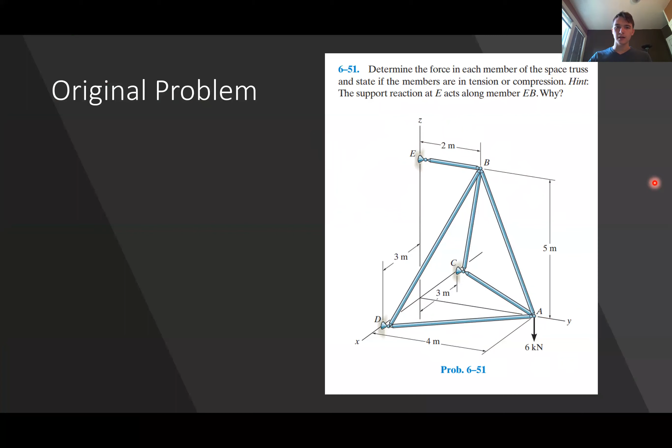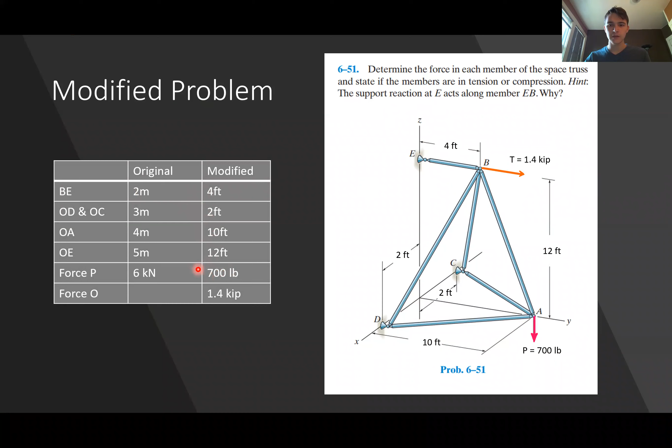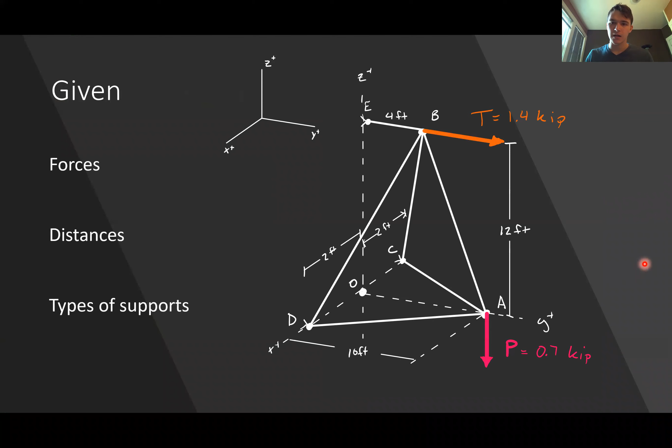This is the original problem, and we've modified it a little bit. So we've actually added a new force, and we've changed the distances and the units. So we were given our space truss, the distances, the forces acting along each point, and we were also given the types of support. It was a little hard to see, but these are actually ball and socket.

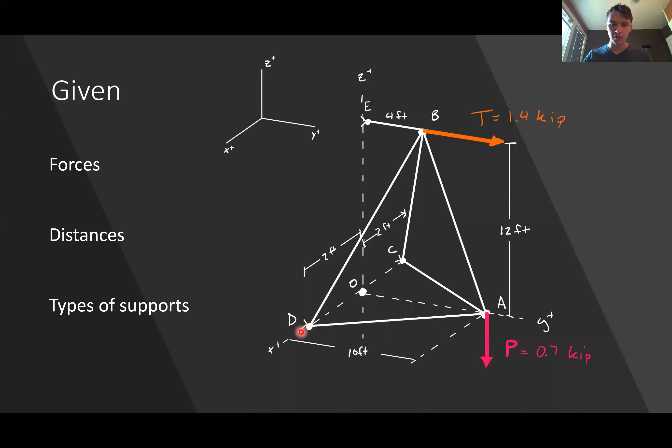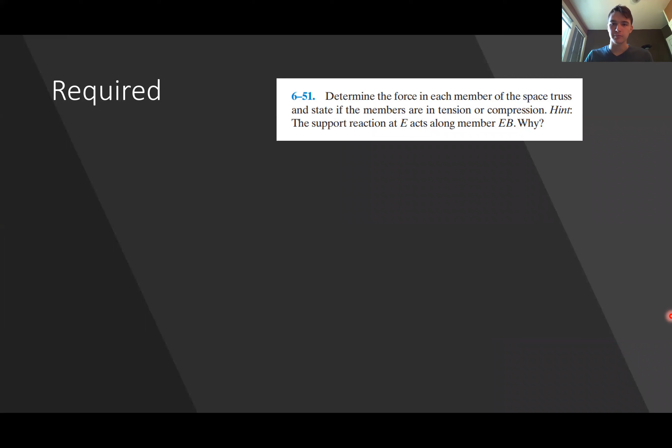So what's required? Well, we need to find the forces in each member, whether they're in tension or compression. And then we'll also need to know the Cartesian vector form. That's what I'll be using, but you can also use the scalar method. I just think the Cartesian is a little bit more straightforward. We also need to know how to use the joint method or section cuts. For this specific problem, I'll be using the method of joints.

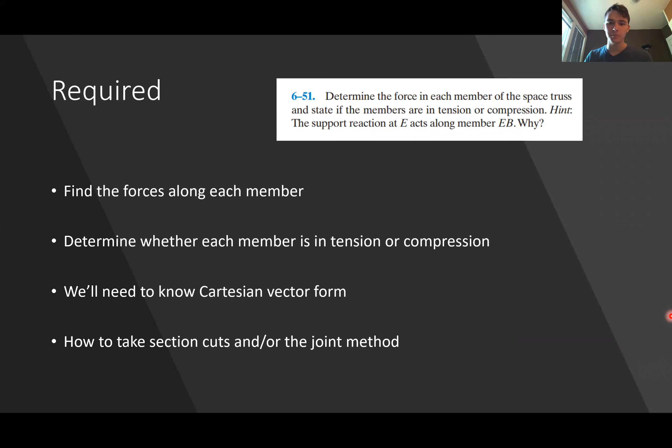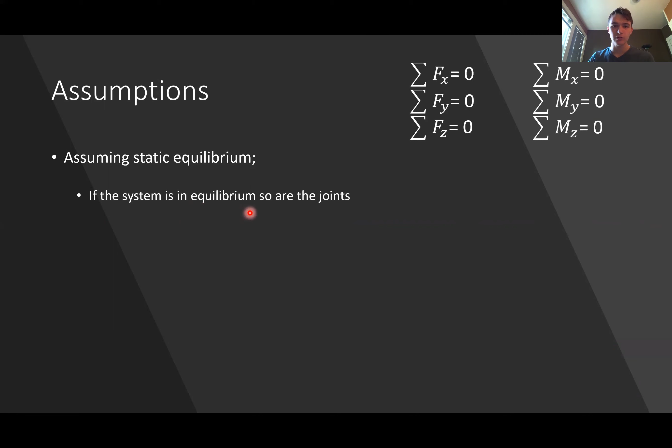So our assumptions, we're assuming it's in static equilibrium, and this gives us our 6 equilibrium equations. And it's a good point to note that if the system is in equilibrium, so are the joints. The types of pins was a ball and socket, which doesn't allow for any translation in the X, Y, or Z. It doesn't allow for a moment, so there are no moments. And then we'll be using the Cartesian vector form, finding the position vector, then the unit vector, and then we'll use those to determine the force in the member, which leads us into strategy.

So we'll actually find each point, and we'll use this to find the position vector, and then the unit vector. We'll use the method of joints to solve the members, and we'll be using this tension technique, which assumes the members are always in tension. And this makes it easier on us. If the value is positive, it confirms it's in tension, and if it's negative, it indicates that it's in compression. And then we'll use the equilibrium equations to solve for the forces.

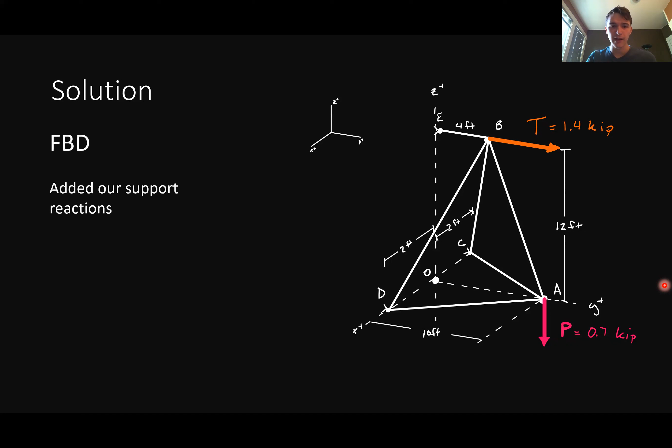So our solution, where do we begin? Well, this isn't a complete free body diagram. We actually need the support reactions. So we have the ball and socket preventing translation in the X, Y, and Z. We have that on D and C. We only have one support reaction on E, and it gave us a little hint in the problem that there's a collinear support member acting along EB. And that's because this member here acts like a free hanging member. So it only allows for one support reaction here.

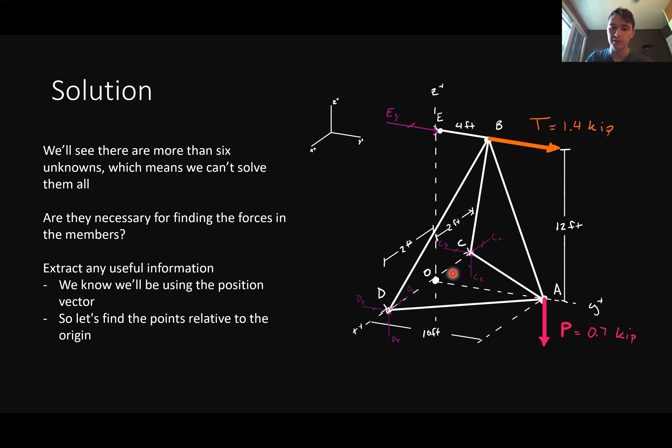But that's still 7, which is greater than the number of equations we have to use. So there's no real way we can solve for the support members with the things that we know now without using any tricks. But is it even necessary to find the support reactions? In this case, it's not. We can start at the joint and still find the forces in each member. We will extract some useful information, like the points at A, B, C, D, and E, in terms of its position from the origin. So we'll do just that.

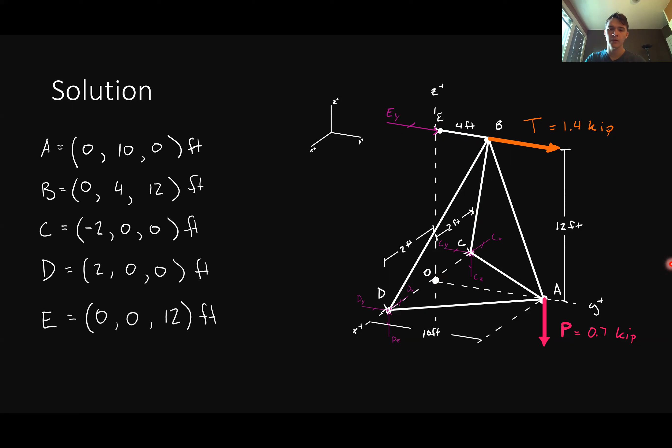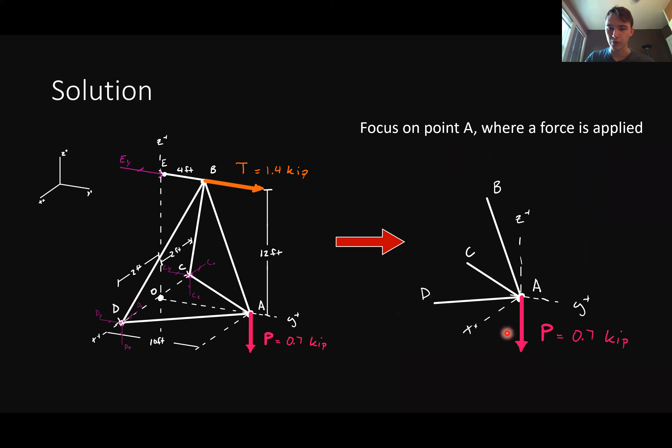So A, it's 0 in the X, positive 10 feet in the Y, and then 0 in the Z. And then B, it's again 0 in the X, positive 4 in the Y, and positive 12 in the Z. And then we do that again for C, D, and E. And then this is where we begin our analysis. So we'll focus on point A, we'll zoom in, and we see that we have member AB, AC, and AD. And then, of course, our given force. So here are our points.

So we just solve for the position vector. And we got this equation from our formula sheet. And I'll be moving kind of slowly for this first member and then speed up for the next ones because the method is the same for all of them. So please feel free to pause the video, make sure you're tracking and following along. But here we see that it's member AB, and that's because we're assuming the member is in tension, so it's going in that direction from A to B.

And in that case, it's the final point minus the initial point. So it's B minus A in the X, Y, and Z directions. So we just plug in our points, and we find our position vector is -6 feet in the Y direction and positive 12 feet in the Z direction. And then we find our magnitude.

Again, we got it from our formula sheet. And our magnitude is just the square root of the square of each of the coordinate directions. And it's about the square root of 180, which is approximately 13.4 feet. And we'll use these two to find the unit vector.

And the unit vector is stated here under the position vector, and it's the vector divided by its magnitude. And we just plug in the numbers again, and we find that the unit vector, it's unitless, is negative 0.448 in the Y and 0.896 in the Z.

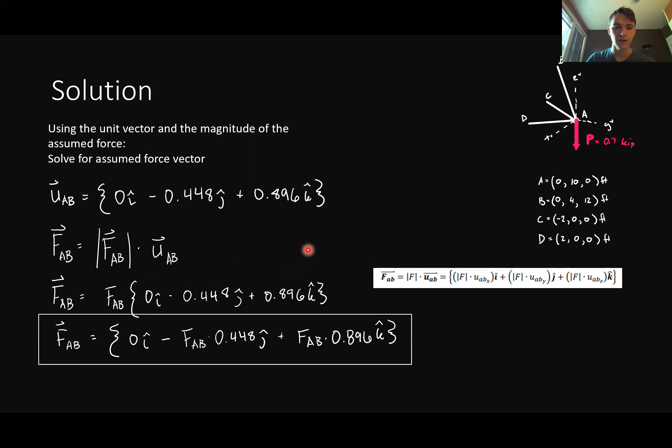So that's what we're going to save. We're going to save that, put it up here. And then we're going to do the same for member AC. Again, find the position vector, its magnitude, use those two to solve for the unit vector, and then keeping FAC in its variable form, we then distribute it across, and then we'll save this one too, and then again for AD. So same method, same process.

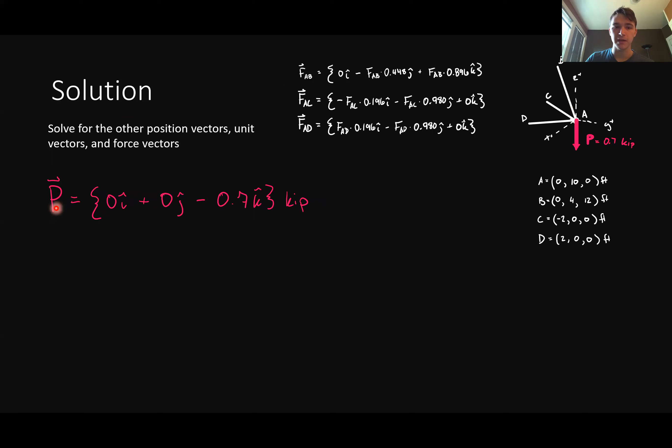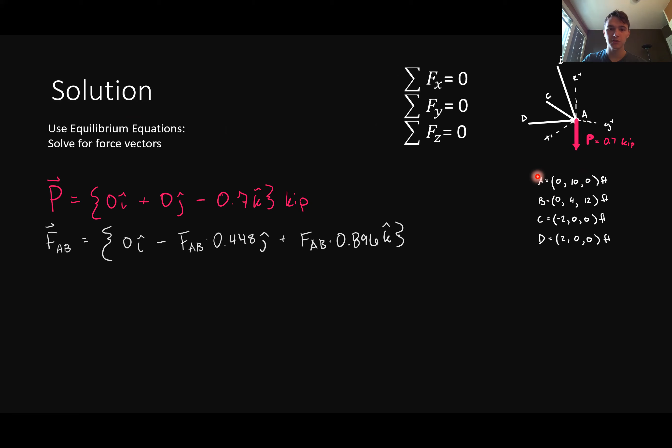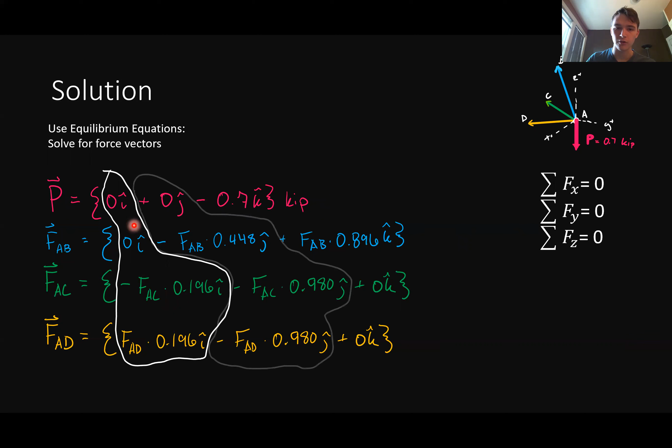And then we were given P, which is acting purely in the negative Z direction. So we'll just rearrange all of our equations. We use our equilibrium equations. And then I'm actually going to color code it so we can clearly see which is what. And then from here, we use our equilibrium equations, and we focus on the same letters. So all of the I's are grouped together, all of the J's and all of the K's are. And then we'll plug in the I for X, the J for the Y, and K for the Z.

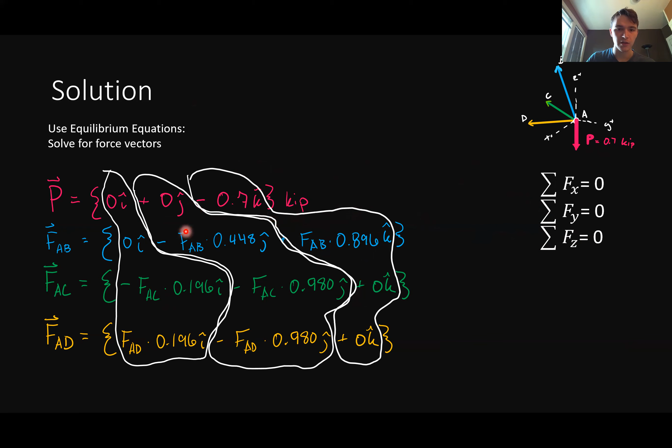And then we'll use a little bit of strategy here. We're actually going to start with FZ because we have one unknown isolated, and we can solve for that variable, whereas the other ones have more than one variable unknown. So we'll start with Z, and we just plug in our numbers, and then we solve for FAB. So it's 0.7 divided by 0.896, and then we get approximately 0.781 kips. And it's positive, so we know it's in tension, and that's because we're using the tension technique.

So we can cross out our summation in the Z direction, and then it doesn't really matter which one we do. I'm going to do X to show the relationship between FAC, and that'll help when we do the summation in the Y direction. So in the X direction, FAC is equal to FAD. And that makes sense because they are symmetrically related to one another. So they're equal, just acting in positive and negative X directions.

And then finally, we use our sum of the forces in the Y direction to solve for FAC or FAD because we know FAB. So here we can plug in FAC for FAD, and then rearranging our equation, we have -2 FAC is equal to positive FAB. And then we just plug in our value and we solve for FAC here. And then we find that FAC is negative 0.228 kips. And the negative indicates it's in compression. And then we know that FAC is equal to FAD from this equation above.

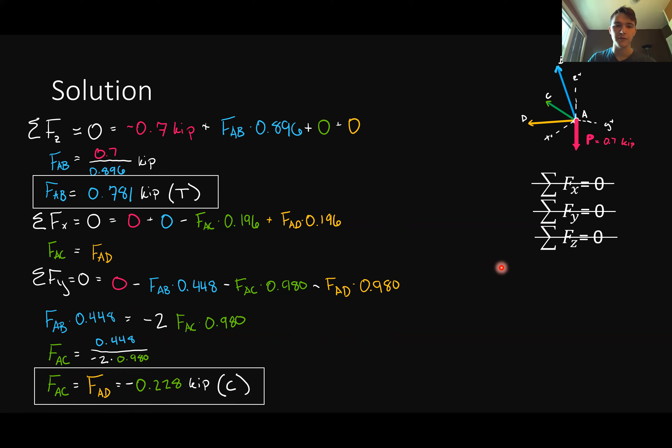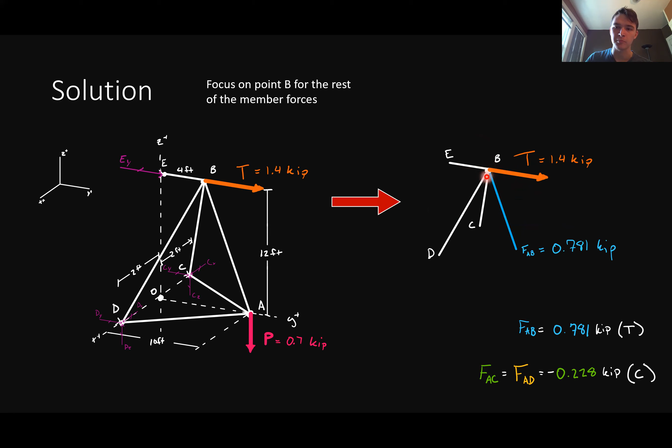So that's half of our work done. We found 3 forces in the members. So we're going to save those, put them down here. Now we're going to focus on the point B. So we'll zoom in here. And we couldn't have started at point B because there's 4 unknowns, but now we can move to B because we know the force acting along member AB here.

So we use our points, same method. It's going to get a little crazy on this page, but again, you can pause the video and make sure you're following along, but it's the same method. We find the position vector, its magnitude, we solve for the unit vector, and then keeping FBE in its variable form, we distribute it across the I, the J, and the K directions. And we do that for member BE, BC, and BD.

And then again, we were given our orange tension acting purely in the y direction, positive y direction. And then we solve for our FAB. And so here is our equation from the last slide, and we just plug in what we solved for. Using our 3 equations here, we move forward, and then we're going to try to solve for our unknown variables. And again, I'm going to color code it so we can clearly see which forces are acting along each member.

So same process. We isolate the I's, the J's, and the K's, and use our equilibrium equations. And there's no real strategy we can use. There's no isolated variable, so it doesn't matter where we're going to start. In this example, I'm going to start in the x direction just to show the relationship between BC and BD.

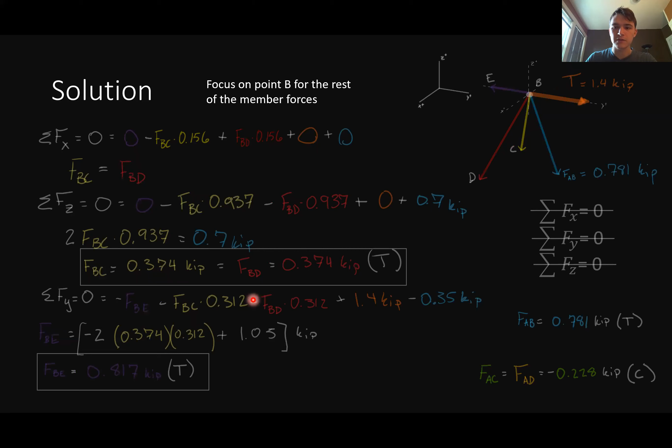And then we save these equations. So we found all 6 of the forces along each member, and we've stated that they're in tension or compression. So here's our free body diagram. We didn't really need the support forces, even though it gave us a hint. It wasn't necessary to solve for those. It is important to note that the support at E is acting only in the y direction, but it wasn't necessary. It's necessary for a complete free body diagram, but not to solve for the members along each force.

So here are our final answers from the slides above. And we'll rearrange those into pounds. They don't need to be in kips. So in conclusion, is this a reasonable answer? I believe it is reasonable.

If we look at our final forces and our diagram here, we see that forces are acting along this point. It's being distributed across BD and BC. We can guess that those are in tension, equally distributed. FBE is less than the orange force. That makes sense. And AD and AC are in compression with a pink force acting downwards. Now we might think that this member, the blue member, is in compression, and that would only be true if the orange force was the only one acting, but we have this P force, so it keeps it in tension.